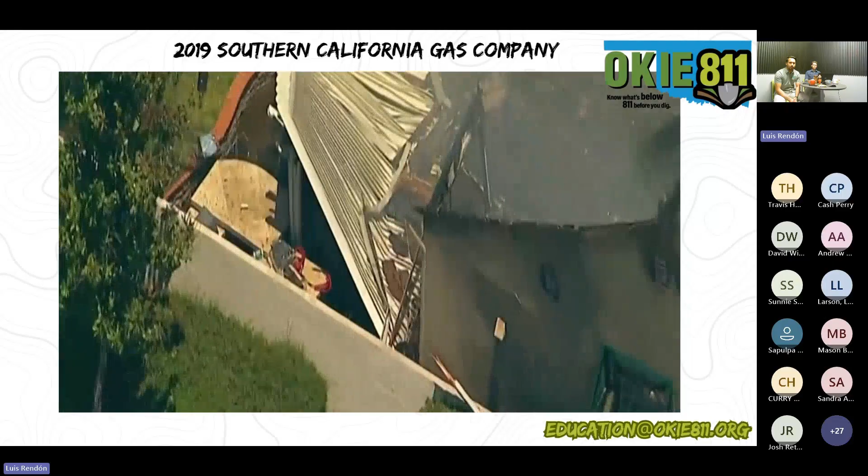It injured 15 people, including 3 firefighters, and killed 1 gas company employee. The big takeaway from this is you don't want a simple job to turn into a tragedy because you're not contacting 811. You're putting somebody else's life, property, or health at risk, and you're also violating the law. So decisions matter. We're always trying to be responsible in our day-to-day work. When you're doing this type of work in this industry, you have to follow the protocols — in this case, the law, the 811 law. Always keep that in mind. Again, it was just simple work, and it turned into a disaster.

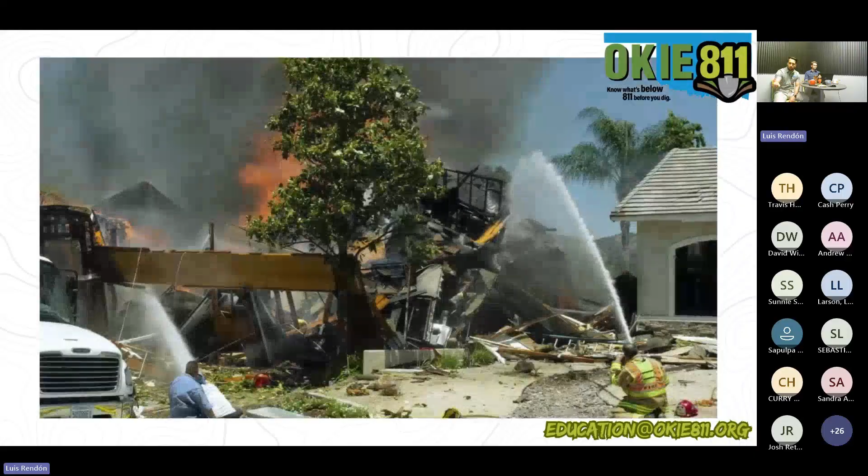I'm going to show you another picture of the incident. We're learning more about that major gas explosion in the Bay Area that completely obliterated a home. This happened in Hayward, just south of Oakland. The large blast also impacted surrounding homes. Eyewitness News anchor Mark Cota-Robles is live in our newsroom with the wild video showing the moment of the explosion. When you see that video, it is incredible that no one was killed. That has been confirmed — 6 people were injured and taken to a hospital after the massive blast. Again, that frightening explosion was caught on camera.

The blast, recorded on doorbell video, destroyed 2 homes. You saw a utility worker ducking behind his truck — he appeared to be okay. This is the devastation from above. It happened in the city of Hayward in the East Bay. The powerful explosion also blew out windows and shook nearby homes, with debris raining down everywhere, landing on neighboring homes and cars. While the investigation is unfolding, we do know the explosion happened just hours after a construction crew damaged a gas line. It was part of ongoing work to widen sidewalks and bike lanes in the area.

The fire department spoke about their efforts in searching for more possible victims: 'Right now, we're going to try to get the fire knocked down, the remaining remnants of it, and we're going to go in and do another search to make sure we're not missing anyone.' The Alameda County Fire Department now confirms that no one else was found. They believe some of the people injured were workers in the street. There's no word if any residents were among those injured. PG&E says the explosion happened 10 minutes after their crews stopped the flow of gas. The NTSB is now responding to the scene to assist in this developing investigation. Live in the newsroom, Mark Cota-Robles, ABC 7 Eyewitness News.

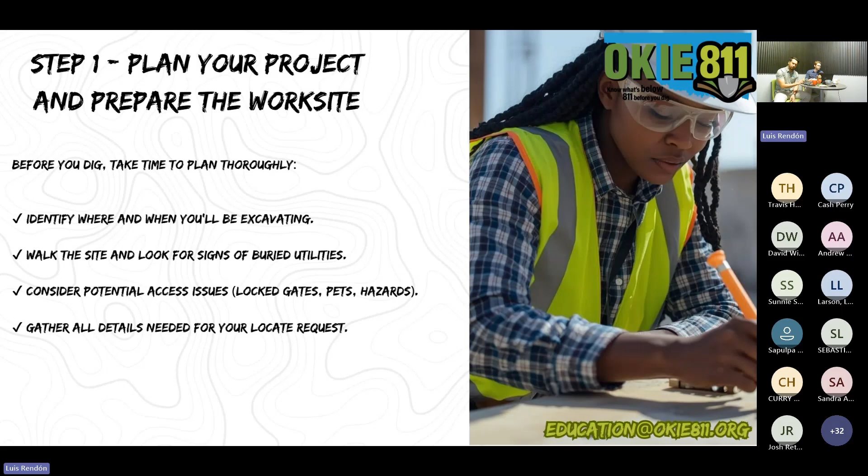Now, when it comes to inspecting your work site, even if your project is small, those buried utilities can run well outside that immediate work zone. So scanning in a 50-foot radius outside of where you plan to excavate helps to prepare that area even further. It is an industry best practice, correct? Yes, this is suggested. If you can actually take the time to do it, it makes it easier.

And again, this is just to avoid any potential damages or any potential delays, right? Right. And look for things as early as possible that could be a potential hazard. Watch for those clues above ground. Even weather, as we've seen lately, can be a potential hazard for that excavation. So looking for things like utility meters, valves, pedestals, overhead lines, tree limbs, those kinds of things as well can also be a potential hazard for excavation.

And again, if you see anything that doesn't seem right, take a pause, contact 811 and clarify everything. Same with the utility operator. Don't just take a guess and keep working. Sometimes that's why this is a highly suggested best practice, just for you to really know your area the best possible before you actually start digging.

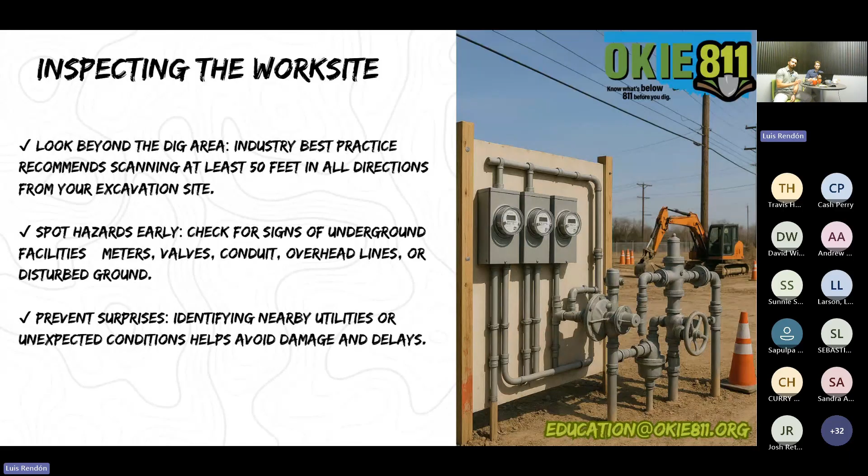Yeah, of course, we're going to need to do our homework, right? We're going to need to make sure that we have all of these maps, all the data that we can collect, like operator records, GIS data, surveyor drawings, as-built plat maps. This helps to prepare you for that excavation as well. Get as much information as possible. You won't exactly know what's below, but these tools can help you spot potential hazards early when it comes to any kind of abandoned lines or underground lines that may have been there pre-existing within that area. So knowing that and having that information readily available.

Completing job hazard analysis, having emergency action plans, and documenting. Using photos, writing out timelines, having all of your paperwork ready to go, documented, and keeping to a schedule. And that's something that with today's technology, we encourage a lot for those who are working especially near regulated pipelines, like, hey, take photos, take pictures, take whatever you see that doesn't make sense, doesn't kind of match with what you're supposed to do at the moment.

Just take photos, just document everything. If there's any investigation about any potential damage that happens, you have that, right? You have that backup to show, hey, you know what, I started working here, this underground facility was already damaged before I got here. And then that can be proactive, right? Right, it's all about proactivity. Have that just in case. You never know what can happen.

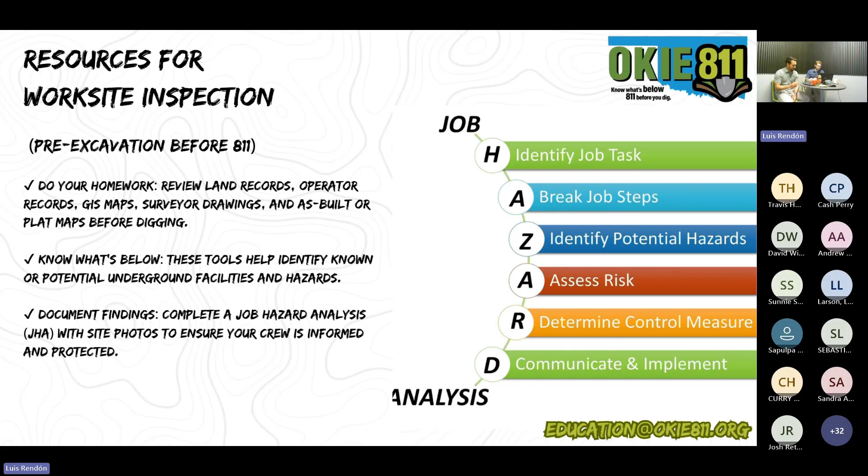And of course, when it comes to planning, it's important to prepare that area that you plan on excavating in. Clearing debris, making sure it's free of obstacles before work begins. Now, like right now with the weather and all the snow and potentially downed limbs and things like that, those would be things immediately that would need to be cleared for that area to be marked.

Yes, right. Of course, marking boundaries so everybody knows the limits of the work zone, assessing those slopes, terrain, nearby structures that could potentially affect safety. As we know, like fences and sheds that could be blown over, those kinds of things.

White lining, which we'll get into a little bit more here in just a second, is how to mark an area before you dig and before putting your ticket. Whatever the proposed area that you want to dig, you probably want to pre-mark it. And then that just makes it easier for that locator to find better, with more accuracy.

More precise accuracy. And then making sure that your project has all the permits and approvals for that excavation before you dig. Making sure that you have all the documentation for that municipality or unincorporated area. Always confirm those easements, zonings, local regulations. Also, if you're planning on demolishing something, you're going to need a permit from that municipality or county before you can actually start submitting a ticket for demolition. So, and then again, it was referenced a little bit earlier, but having a plan in case everything goes sideways.

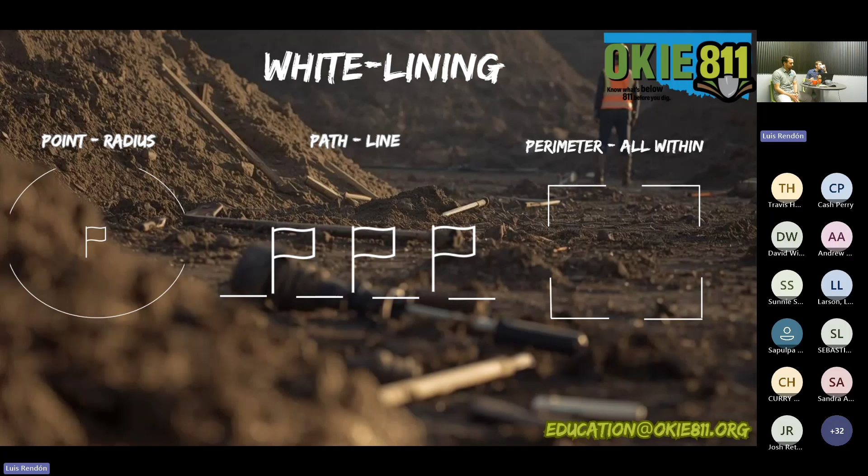Now, Bo, we're going to go with the most important step, step 2. That is the most important step, right? Before any excavation begins, you're legally required to contact 811. More than anything - maybe you can get by with step 1, but you always have to do step 2. Do step 2, for sure.

By law, you must notify OKIE 811 if you are excavating within the state of Oklahoma. Those requests can be submitted online 24/7, and by phone Monday through Friday, 6 a.m. to 6 p.m. After 6 p.m., only if it's an emergency, second notice, or damage report.

And so you're going to reference back to that first step with complete information. Incomplete or vague tickets create a lot of confusion for our locators. Well, and they have to be very clear - those facility operators, locators - we don't have locators, but we want to make sure clear details are present on the ticket to help those operators locate and mark correctly and efficiently.

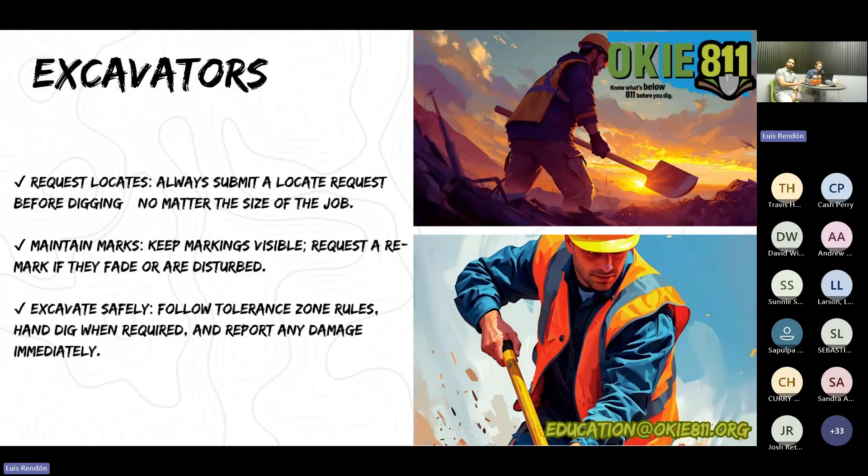Now when it comes to actually getting those tickets, getting that contact info, we can put the example: you're the excavator and I'm the office admin. Right, yeah. So you're the office admin, you're the one making the ticket.

So every locate request must include the name of the person submitting the ticket. And that would be me, the admin. And then a field contact as well.

This helps in case the locator needs access to the site. Yeah, I would be the field contact doing the excavation. So I have to make sure I put both pieces of information in that ticket. I could probably have information and know what's happening, but I may not. I may just be told, hey, contact 811 for this specific project, but I don't know anything else.

So it's important that that communication is clear. Whoever is putting up the ticket, whoever's contacting 811, gives the field contact information just in case something is not clear, so the locator can contact directly - in this case, Bo, who has full knowledge of the work site. It can also help if the response is a watch and protect, so they can immediately work out contact, or for any questions, both the excavator and the locator have to be easy to reach each other. That communication being streamlined is very, very important.

And of course, company details - names, address, phone - all the general information that would be required.

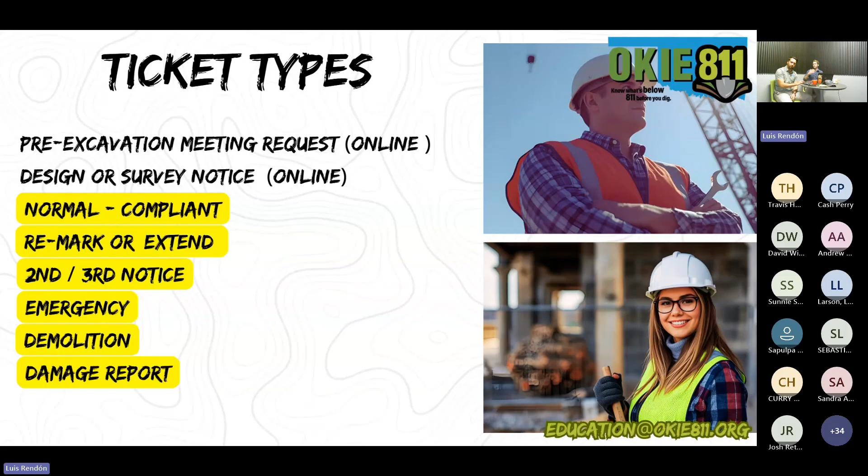Knowing what ticket you need — most of the time it's going to be a normal compliant ticket. That's a typical excavation job, and it's something that can be done within a 14 calendar day span. If not, then the completion date would need to go a little further. But normal compliant, yep.

So, standard locate request — this is the most common ticket type. It's just a standard locate request submitted before any planned excavation. Giving that advance notice, there's a window of a maximum of 10 days and a minimum of 48 hours, excluding holidays, weekends, and date of notification, but the more time in advance, the better for the locate.

It must be submitted as non-emergency. Highlight that — non-emergency. This is just a normal ticket. You're planning an excavation, and this is just the flow, and it will be valid — everything from home projects to contractor work, job sites, anything that would be disturbing earth.

Validity is 14 calendar days. Once that start time arrives to the end of that 14 days, that is the operational time of that ticket.

Let me give an example. A contractor is installing a 200-foot water line trench on a residential street. They submit a normal locate request on Monday. Operators have until the end of Wednesday to respond. Digging can legally begin Thursday, and then the ticket stays valid for 14 calendar days from Monday.

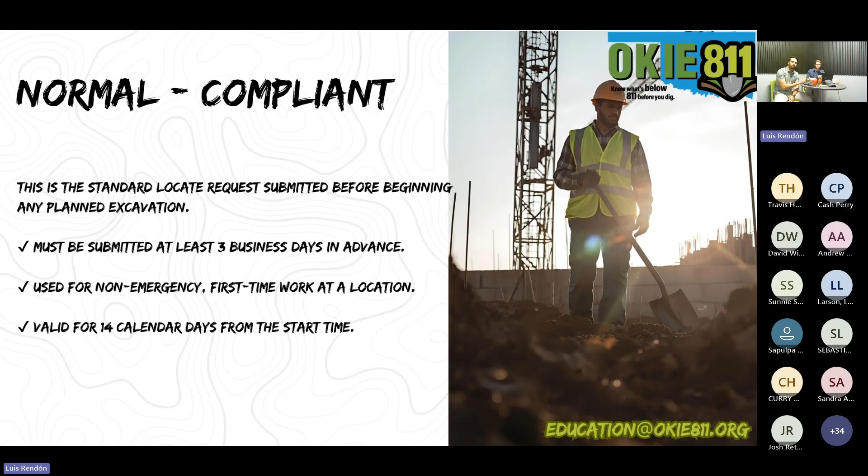But then we have update tickets, such as remark and extend. With a remark, you submit it when marks fade, are disturbed, unclear, or you're unsure of those marks. It's a great opportunity to get those refreshed. It must cover the same location and scope as the original ticket. It doesn't go outside of that, it stays within that original ticket.

And it does extend the life of that ticket for an additional 14 calendar days, as long as that doesn't go beyond the estimated completion date.

So you have an example for us, Luis? Yes. A contractor is trenching for fiber—fiber is so popular now, fiber everywhere. Rain washes away the marking after 10 days. They submit a remark request so locators return and reapply marking before work continues.

And just a quick explanation of how remarks can happen: let's say you have the ticket, the life of your ticket is still valid within the 14 calendar day window, and then you have your work site. One part of the work site is marked, but the other side of the work site is not marked. You can still work wherever it's marked, but on the other side, you're going to have to submit a remark and wait until that's marked again.

14 calendar continuous days, or 14 days not including holidays. So it is continuous, 14 calendar days, which are a continuous period. And when we get into waiting the required time, we'll talk more about that as well.

Second and third notice is given if a facility operator has not responded or failed to mark a site. This is pretty much just a bump, telling them, hey, can we get somebody out here to make sure this is all marked and that we have our response. It's a way to request compliance, but not give more time. It's just reaching out to that operator, letting them know we don't have markings and it is our start date for our project. We need to make sure we are covered. The original ticket timeline still applies. It does not reset the 14 calendar days. Once it started, it has started.

So you have to be on it. You have to make sure you're following up with your ticket, checking your positive response, because if you forget, then the days are passing and you're losing days of your project. Make sure that if in 48 hours you haven't gotten a response, contact 811 right away, so we can contact the member, the utility operator, so they can go and remark.

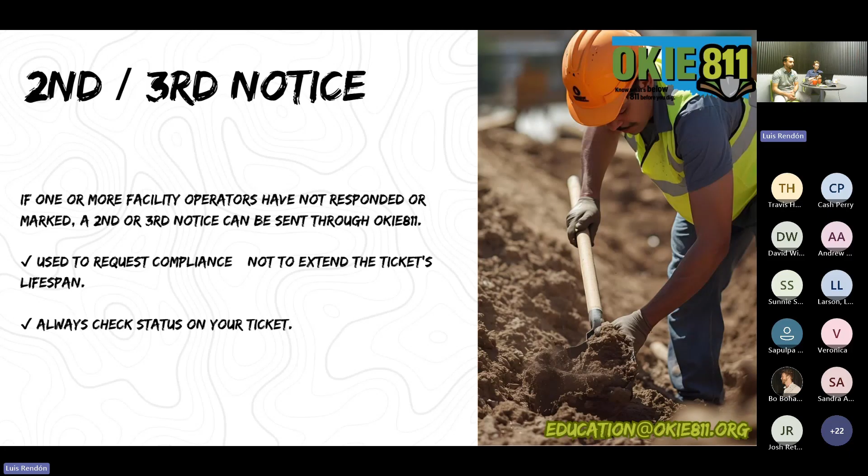If you want to go ahead and call 811 directly, do so. But if you haven't gotten any response, haven't seen anything, the right way to do it is just submit a second and third notice. Hopefully you never have to submit a third notice, because that means things are behind a lot.

Emergency tickets. This is an immediate threat to life, health, or property. Those three are the legal definition: life, health, property. This is the legal exception to the rule of waiting, but it is not a shortcut.

Providing notice, call as early as possible, even if work must start immediately, but still try to give some time if possible. The more detail you give about what is occurring, the faster operators can respond, so as much detail as you can give, the better support can be provided. Explain the emergency, be clear about the situation. Is it a gas leak? Is it a water main break? A sinkhole, power outage, something along those lines.

I'm assuming there were power outages in some states with this winter storm that happened, that's very common. So yeah, that's an emergency. You need to restore power right away, because that is a threat to health and property.

So proceed carefully. Even in an emergency, safe digging practices still apply. Hand digging and being cautious are essential to avoid making the situation worse.

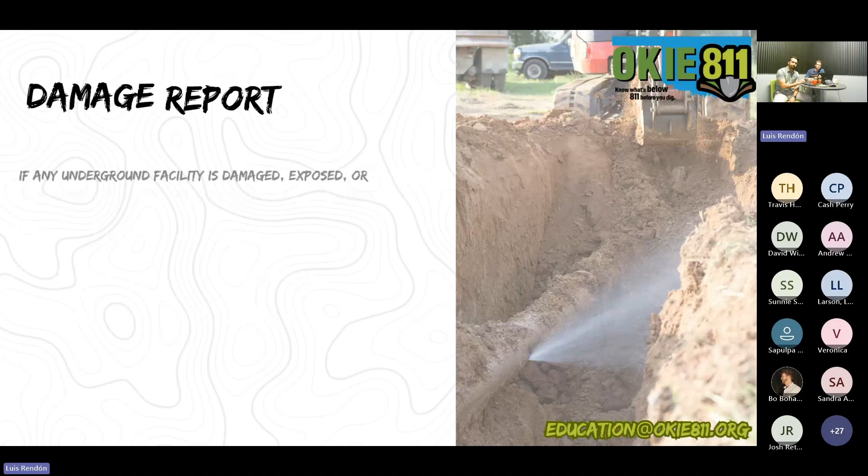Damage reports, no matter what kind of damage it is, anything that alters the original state of that utility can be considered damage and should be reported. By law, all damages must be reported immediately, even if they look minor or don't cause an outage. Damage includes nicks, dents, scrapes, exposure of a facility. It's not just a break or a leak, it's something that alters that original state.

Notify the operator by contacting that utility company directly so they can inspect and repair the facility if needed, and submit a damage notice by reporting it to Okie 811 through a damage notice ticket. This ensures there's a documented record and the operator is officially notified.

Let's say I'm a construction worker doing excavation, and as soon as I start digging I see a pipeline, line, or underground infrastructure that has already been damaged. At that point I have to stop, report that, and document it. Because if I don't, we don't know what work happened there before I got there.

There has to be transparency about what's going on, because you have to be considerate and responsible. Let's change the scenario: if I damage something while doing a job and don't report it, and it's just a minor scratch or dent, then the next guy comes a year or so later, does another job in the same area on the same underground infrastructure, uses different equipment or doesn't follow the tolerance zone, and hits the line and it explodes. That's a full-blown situation that happens because I wasn't being responsible and didn't take care of what I needed to do, which was report that.

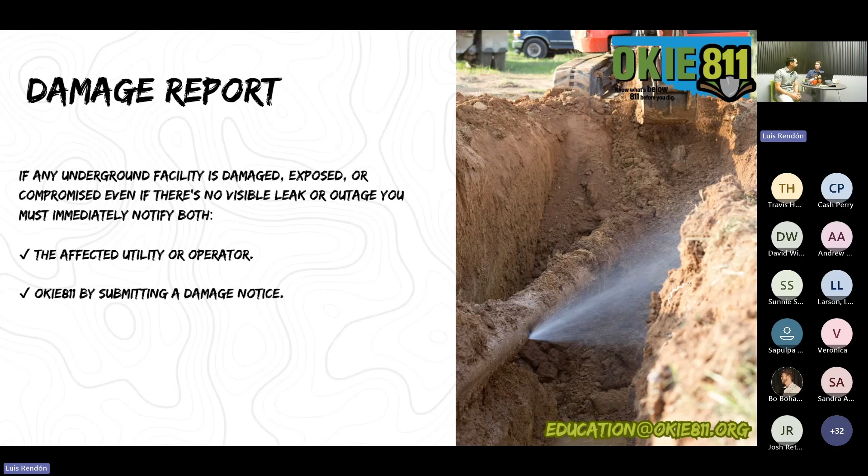Damage reports must be phoned in to Okie 811. You have to call 811 anytime you are putting in a damage report.

Coming back to excessive or unreasonable locate requests, excavators must only request locates for work that will actually start within 14 calendar days. Submitting tickets too early or for areas you're not actively working on can be considered abuse of the system. It's not a scheduling tool - that's why we have Google Calendar, Teams, and Outlook. There are options for scheduling, but 811 is not one of them. 811 is for active excavation, not for reserving time or just-in-case planning.

Excessive or unreasonable requests, like repeatedly filing tickets for inactive or untouched areas, ties up resources and wastes operators' time. According to Oklahoma law, the OUFDPA section 142.6K, allows operators to recover costs from excavators for these kinds of abuses.

For example, a contractor submits tickets for an entire subdivision but only works in one small section, while the rest of the lots sit untouched for weeks. This is considered excessive because it forces operators to mark areas with no excavation activity. Putting up a ticket on something nobody is even working on or keeping an eye on - if nobody's working on it, the ticket should be held until work is ready to begin.

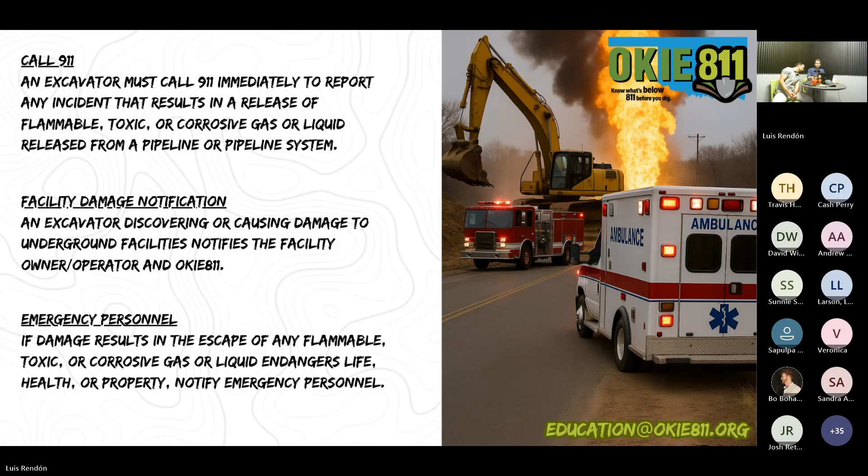Common mistakes and how to avoid them. Even the most experienced excavators can make a mistake that leads to damage, delays, or fines.

Common errors include starting work before the legal start time. This seems kind of silly, but don't rush. I know patience is hard, but patience is key. It's something you have to work on every day. It's hard to be patient, I get it. Patience takes time, but it's important in this industry and in the 811 process.

Digging without checking all utility responses is another common mistake. You have to check the responses you get from the utility operators. If you don't, and you just see some marks and assume it's fine, you might not know if they gave you a specific answer for one of those underground lines. What if you get watch and protect? Then don't just assume—always check. That's something I've learned over the years: never assume things, just get clarification if you need to.

Misusing ticket types—Bo just mentioned that—putting up an emergency ticket, a remark, or an extend when it's not appropriate. Really, there's no need for it. Don't do that. Use the right tools.

Here at Okie811, we provide the excavator portal, which helps you manage and track tickets in real time. We also have the Learning Hub that provides training and certification to stay compliant with the law, and the Excavator Guide and Law explains responsibilities under Oklahoma law. We're going to have our new guide for 2026 coming out soon, with updates. We'll have it in Spanish for those who have crews, workers, employees, or colleagues who speak Spanish and have a better understanding by reading it in Spanish—that's coming soon as well.

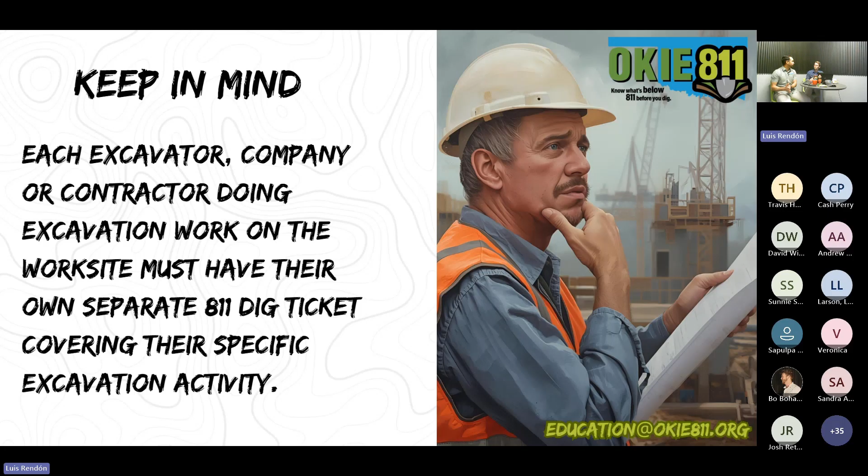So keep that in mind. Every excavator doing work at the same area has to have their own tickets. No sharing, no being besties or anything, that does not matter. It comes down to focusing on that scope and how everybody is going to have a different perception of that scope going into it. So making sure that is on the ticket, everybody has their own compliant ticket. It could be the same project but a different type of work at that moment.

Step 3, now we went through step 1, you prepare your area, you have full knowledge. Step 2, you contact 811. You know the type of work you're doing, you know all the ticket types that exist, you know when an emergency happens, when an emergency is not happening, when to wait, and how long your ticket lasts. All that information, you have it in your hands.

Now it's time to wait, the famous word being patience, right? The waiting period is the 48 business hours. By law, you must wait two full business days after submitting a ticket. Weekends and holidays do not count towards the 48 hours. The date of submission doesn't count either. The clock starts the next business day after you submit the ticket. For example, if you submitted a ticket on Tuesday, you cannot dig until Friday morning, assuming there are no holidays.

So it's pretty straightforward, Bo. Maybe let's give an example if it was a holiday. Like if Labor Day is on a Monday, you submit a ticket on Thursday. Thursday doesn't count because it's the day that you submit the ticket, right? Friday doesn't count, Monday doesn't count because it's a holiday, right?

Would Friday count? Friday will count. Yeah, Friday will count, sorry, Friday. That's it, that's me, you're good. Friday counts. Monday doesn't count, right, so Saturday, Sunday, Monday doesn't count. Wednesday.

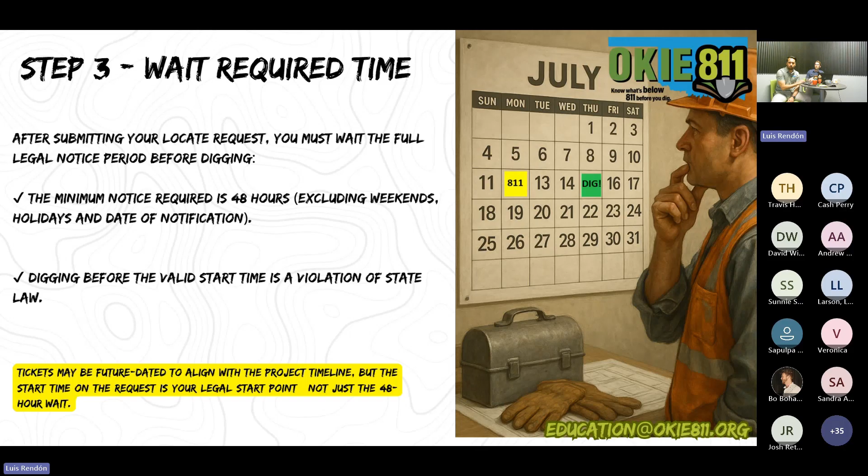Again, try to provide as much time as possible for those locators. The minimum is 48 hours, but maybe give it 3 to 4 days ahead.

Why is it so important? It's crucial for excavators to wait until the work to begin date and time after submitting a locate request, to ensure safety and accuracy. Okie811 processes that request and notifies utility operators with underground lines in the area. Operators then review the information, make sure everything looks right, dispatch the locators, and mark the utilities with paint or flags. This notification window gives all operators enough time to respond and helps prevent damages, injuries, and costly service interruptions.

So it's pretty simple: you make a call or use the computer, we get the information, we submit it to the members, the utility operators that own the assets in the area where you intend to dig. They'll review everything, send those locators, get the response on the positive response system. You check it, make sure everything's good, and you're good to go, good to start digging.

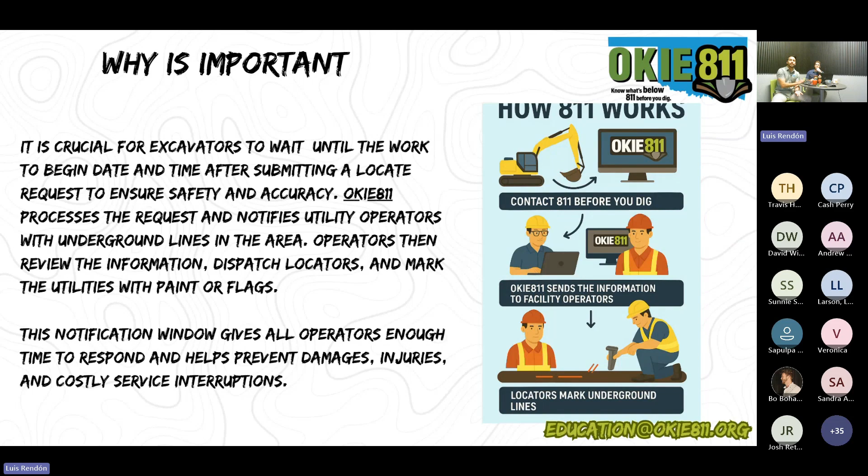Facility operator and locators' responsibilities: first, they have to maintain their maps. Facility operators must keep their digital service area boundaries accurate in the Okie811 system. Any utility operator that owns underground infrastructure has to keep their maps updated within our Okie811 system. If they have a new asset or a new underground facility, they have to let us know and update that map so we know where they are.

Obviously sometimes it can happen that somebody's doing a job and that underground line is not registered, so it can't be seen on the map, which could create another situational problem. Right, absolutely. Outdated or missing maps equals notifications don't reach the right operator, which creates risk.

Also, locators have to try to mark as accurately as possible using the APWA, American Public Works Association, color codes: red for electricity, yellow for gas, blue for water, green for sewers, purple for slurry.

Marks must be placed within 48 business hours of the request. Accuracy is critical; a wrong mark can be just as dangerous as no mark.

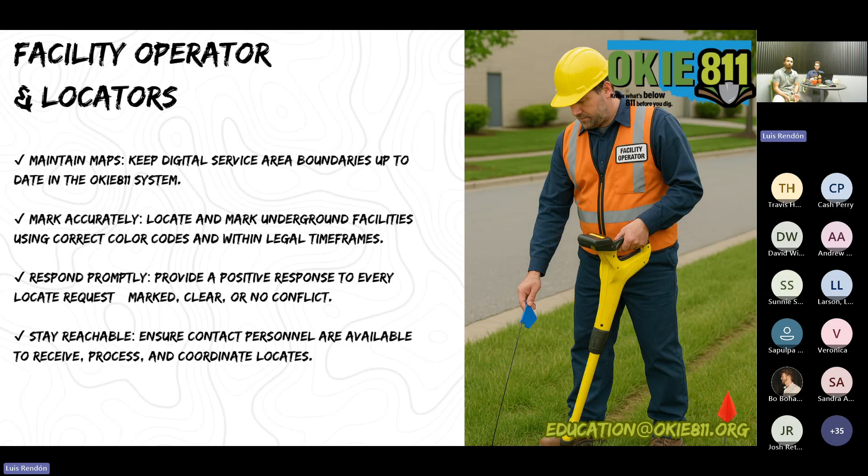So again, don't rush, be patient, take a pause if you need to, and contact 811. We're here to help. And if you can't find the locator's number, we'll probably provide it to you, and you guys can make those connections as soon as possible.

Positive response: don't assume, never assume. If you see paint or flags on the ground, it's your legal responsibility to check the positive response system. This is step 4, mentioned after waiting that period of time. You have to check your positive response, which confirms that every notified operator has responded to your ticket.

Protect your marks as well. Once confirmed, it's up to the excavator to keep the markings visible and intact. Avoid driving equipment over them, washing them away, or letting them fade unnoticed. If they get washed away because of rain or any natural cause, submit a request or request a remark. If marks are missing, damaged, or unclear, submit that remark request so a locator can come back and remark your area.

Marks are only valid for 14 calendar days. After that, they must be refreshed. I know in some states, I think Colorado, a ticket may last up to 21 days, but I'm not quite sure. It can vary by state, but here in Oklahoma it's only 14 calendar days.

It does vary by state, as well as the tolerance zone, but the consistency is that there will be a response system, a post system, a tolerance zone, and a wait period. So be sure all these safety steps are followed, and check each state's parameters if you're excavating outside your state. However, in Oklahoma, these are ours.

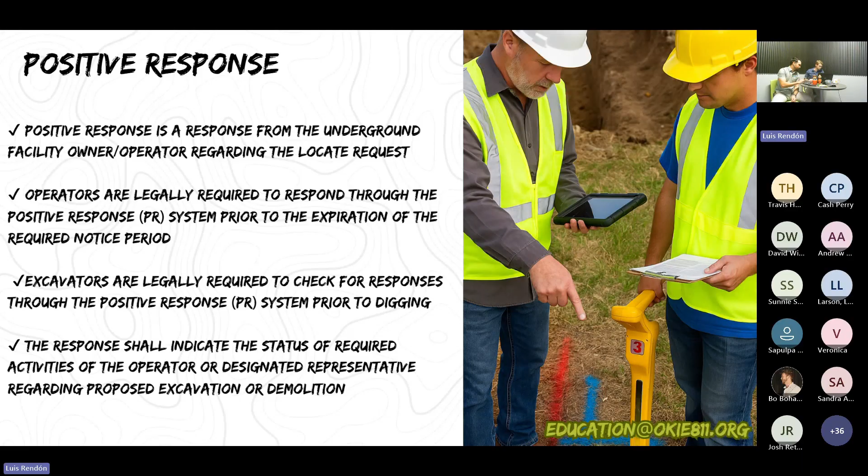Do you have any questions, Bo? No questions so far. Good, that's good - that means we're doing our job.

More on positive response - these are the types of responses you'll get from the utility operators: clear, site marked, partially marked, or for a large project, no access, not marked, correction required, not marked. You may see these in your submission, so you have to keep an eye on that. Some of them are optional, and others are required.

More on positive response: watch and protect. This is probably one of the main ones, for people working near regulated pipelines. By law, the gas company must include the name and phone number of the contact who will be the representative for observation. This representative will be at the work site with the excavator, making sure they're following the tolerance zone and not getting close to or hitting the gas line. So you have to make sure you maintain that communication with the representative.

Look at the number - again, if you don't get a response, make sure that for any situation you always keep screenshots, print the emails, whatever it takes, because if for some reason that representative doesn't show up and you have to start the job and something happens, then you have this information.

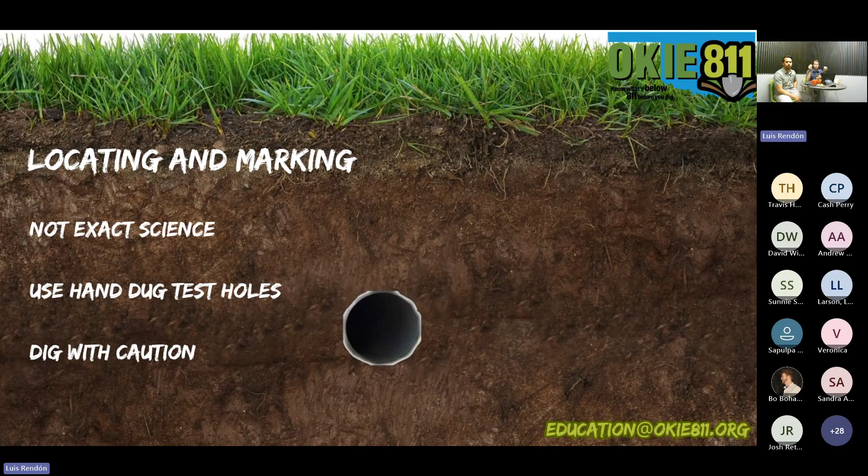A great example: a crew expected a water line to run straight across a yard where it was marked. Instead, the line curved towards the driveway, and because they used hand-dug test holes first, they spotted the curve and avoided breaking the line. So the marks are there to guide you and to work within that tolerance zone, but they're not going to be precise on where that location of the utility will be.

I think I jumped ahead. Always check the positive response system to verify that the operators officially cleared that area. It's always important to match those markings with that positive response and make sure everything is consistent all across the board. If you have some markings on site but no positive response, that needs to be confirmed first. If you have a positive response but no markings on site, there needs to be that leveled out with everything.

So an example for you guys: a homeowner requests a locate to plant a tree in their backyard. The telecom company replies no conflict, because their lines stop at the front yard. Since there are no lines in that dig area, no markings appear in back. So again, just checking in makes it way easier.

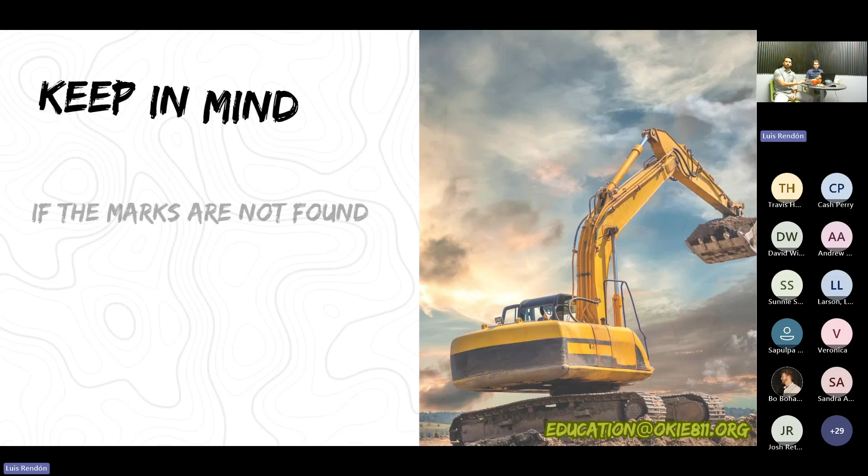Keep in mind that if the marks are not found where expected, excavation has to stop and the facility operators must be contacted.

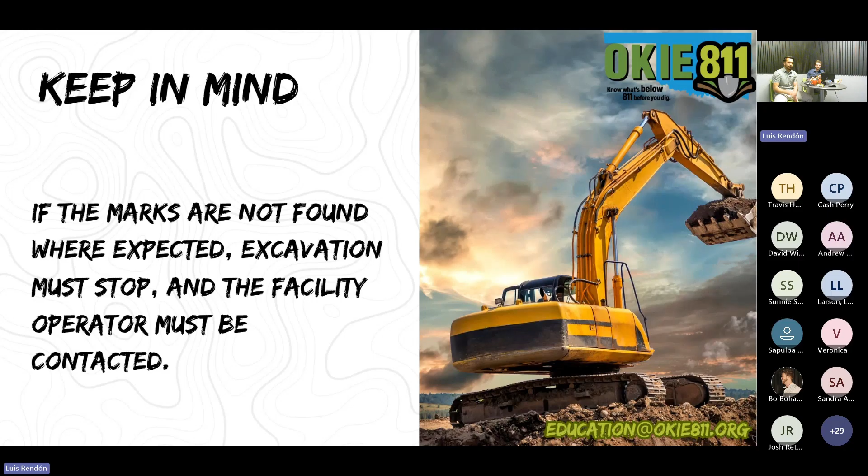Last, step 5, we're going to talk about the tolerance zone and digging safely in Oklahoma. The tolerance zone is 24 inches on each side of a marked underground facility, measured from the outside edge of the mark. This creates a buffer zone that protects both the utility and the excavators. It's highly suggested that you use hand tools within this area. Switch to hand digging or vacuum excavation. Mechanical equipment is too risky close to those lines. Heavy equipment is not good for that kind of stuff.

Expose the facility with hand methods so you can see exactly where it is before bringing in machinery. Remember, paint marks only show the approximate location. Proceed slowly. Most damages happen when excavators rush through the tolerance zone. Take your time. This is trying to prevent damages, outages, and injuries.

The only way you can use heavy equipment is if you're respecting the tolerance zone, and outside of that tolerance zone you can expose, protect, and visually see the underground infrastructure of that facility. Once you have those three boxes checked, you can use heavy equipment while respecting the tolerance zone. Maintain that clearance.

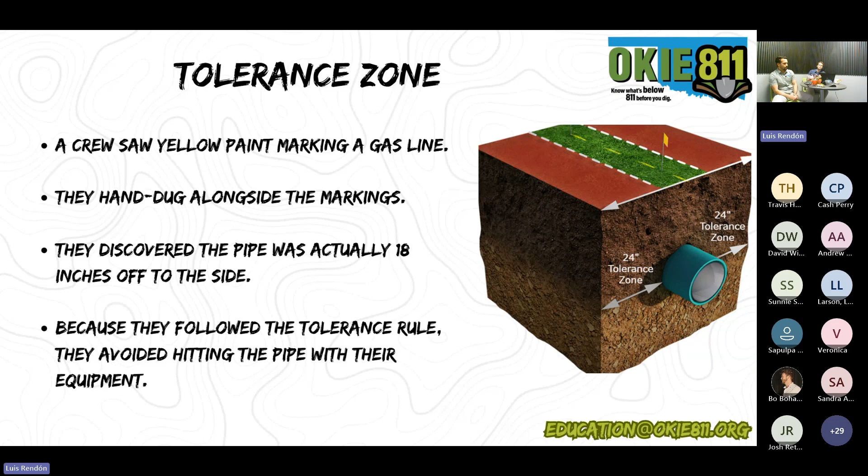We forgot to mention this about damage reports. Sometimes when you use a hydrovac, it can remove that protective layer on certain gas lines. So you need to be very cautious with the PSI being used with hydrovacing. If you notice the protective layer potentially being faded off, it's very important to report that as a damage so it is replaced and taken care of.

Additional information. Private lines, what are they?

Private lines, also called customer-owned lines, are underground utilities not marked by public utility companies through OKIE 811. They usually begin after the service meter or the utility's demarcation point. It's up to the property owner or excavator to identify and protect them. Examples include a gas line to a grill, pool heater, or detached garage, water or sewer lines running from the house to an outbuilding, electric lines to sheds, barns, or landscape lighting, and private fiber communication lines on a campus or large property. Everything that is passed over or turned over from the locator to the property owner, and everything installed by the property owner, is considered private lines.

What to do when you're working around private lines? You have to have clear communication with the property owner, making sure they know where the private lines are. If they know where they are, it'll be way easier for the excavator to dig safely. But if not, they have to keep in mind that they're going to need a private line locator.